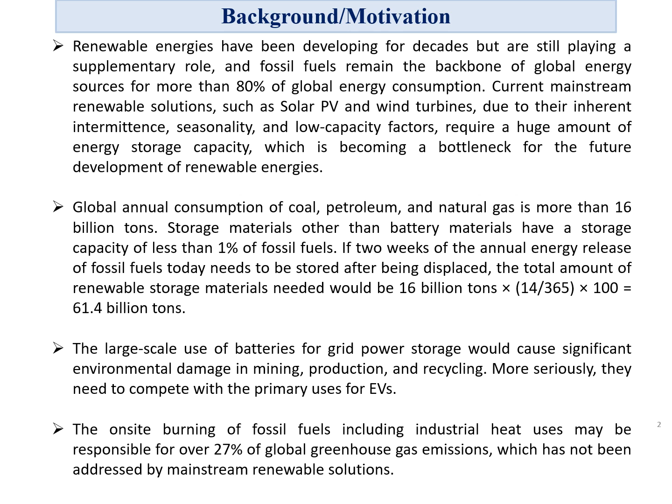This strategy is a nature-based solution, NBS, to tackle global warming, a problem rooted in natural processes. It proposes simple, natural fluids, utilizing water for storage and air-water systems for power generation, avoiding harmful chemicals typically used in other processes. This method allows for eco-friendly and economical energy storage and generation at low temperature on a large scale.

In particular, the utility-scale underground hot water storage system serves as an alternative to fossil fuel, providing a reliable source of thermal energy for power plants and heating for both industrial and residential applications as needed.

Our air-water power plant can generate a stable more than 100 megawatts of power using hot water stored at nearly 100 degrees C. This system replaces traditional fossil fuel power plants, ensuring consistent power supply regardless of weather conditions.

Overall, this approach not only significantly reduces environmental impact, but also cuts costs for both power and heating, helping to phase out fossil fuel with a sustainable all-natural solution.

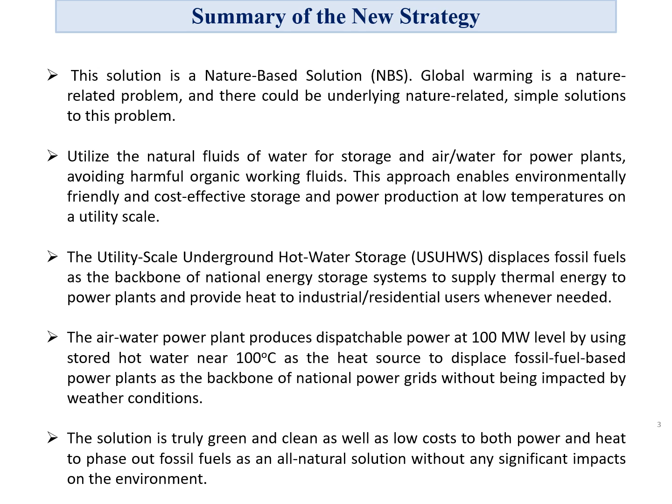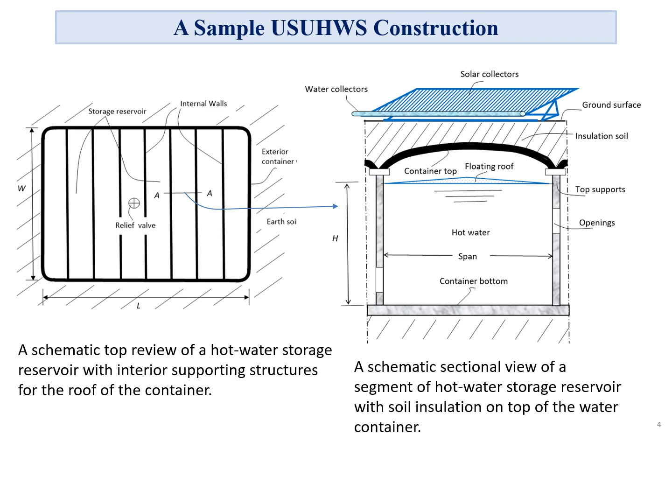Let's talk about sample calculation results of the underground storage system. First, our storage system is incredibly efficient, storing over 80 times more energy per kilogram of water than traditional methods like pumped storage hydropower and compressed air energy storage.

If the size of the underground storage system reservoir has dimensions of length equals 500 meters, width equals 500 meters, and height equals 15 meters. The hot water temperature is at 120 degrees C. The thermal to work conversion efficiency is only 10%. And the water temperature drop before the recharge is 40 degrees.

The total work storage capacity is about 1.75 times 10 to the 7 kilowatt hours. For a power plant of 100 megawatt capacity, the stored energy can sustain the operation continuously for 7.3 days before recharge is needed.

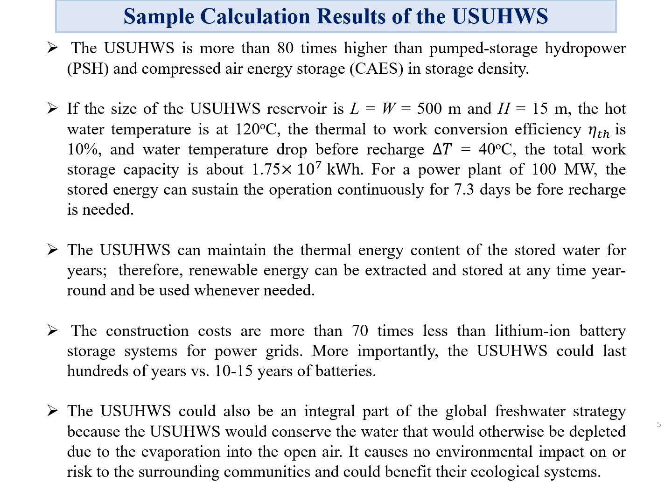The underground storage system could also be an integral part of the global freshwater strategy, because the storage would conserve the water that would otherwise be depleted due to evaporation into the open air. It causes no environmental impact or risk to the surrounding community and could benefit their ecological system.

We are also exploring underground tunnel storage solutions, which could be integrated into mountain areas, using tunnel boring machines, enhancing our capacity and flexibility in storing and utilizing hot water.

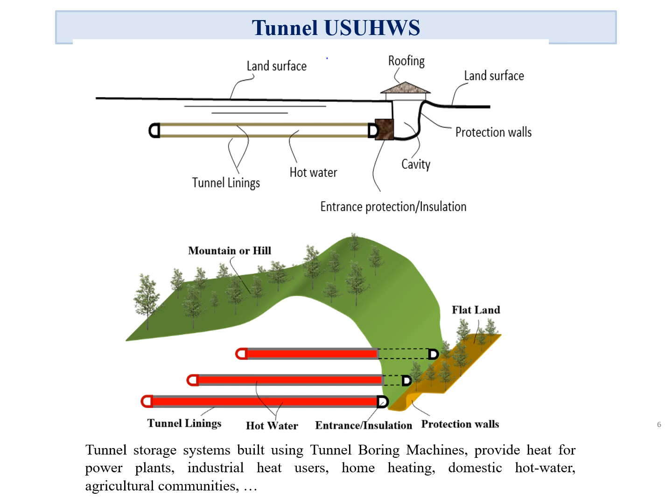Turning to how we collect energy, our starting point is using both direct and diffused solar energy with cost-effective, non-concentrating solar collectors. For the collector's output temperature to be above 100 degrees C, we still have good collector efficiency, with high-performance evacuated flat plate collectors as well as concentrator augmented tubular solar collectors using compound parabolic trough collector (CPC) for hot water production.

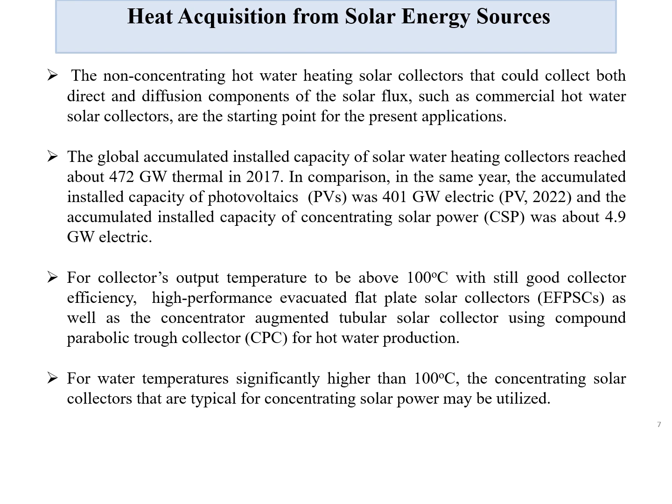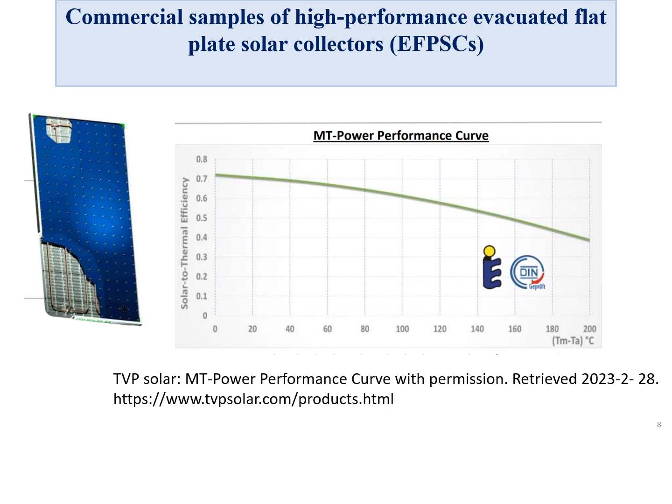Let's turn to air-water thermal power plant. First, some background. We have air-water thermal power plant working with low temperature source, based on the Office of Energy Efficiency and Renewable Energy. Geothermal energy resources below 300 Fahrenheit, or 149 degrees C, represent the most common geothermal resources. A thermal power plant that could enable the use of vast amounts of thermal energy resources at low or medium temperature to generate electricity on a utility scale could have a significant impact on the advancement of renewable energy.

However, this kind of power plant is not currently available, even though some organic Rankine cycle power systems using isobutane, pentane, ammonia, or refrigerant have been developed over the past 40 years. However, the use of hazardous substances working at very high pressure and generally high vapor density has limited power capacity to within 1 megawatt level, with a thermal efficiency of about 10%.

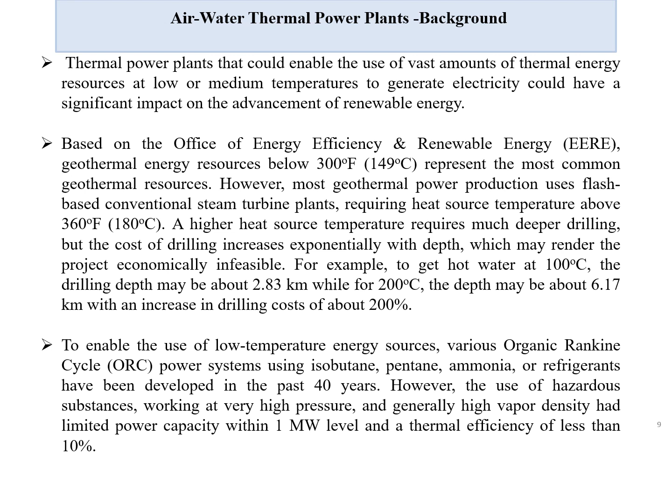For this reason, the concept of an air-water thermal power plant is conceived. Air, or combustion gas, is the exclusive working fluid of a conventional gas turbine-based power plant. The heat acquisition before expansion in a turbine is through sensible heat, which may require more than 1,500 degrees C through the combustion of fossil fuel to attain sufficient sensible heat for high turbine power production.

Water is the exclusive working fluid of a conventional vapor power plant under closed cycle operation. Any meaningful accumulation of air or non-condensable gas is not tolerable and must be removed by a vacuum pump, which may require a heat source temperature significantly higher than 100 degrees C.

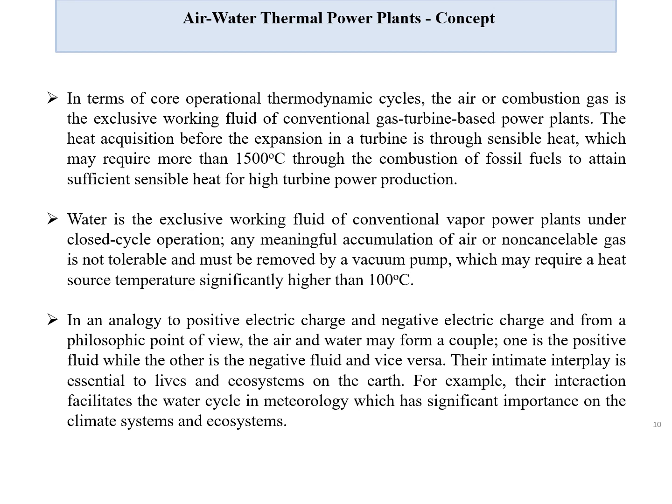In analogy to positive electric charge and negative electric charge, and from a philosophic point of view, air and water may form a couple: one is the positive fluid while the other is the negative fluid, and vice versa. Their intimate interplay is essential to life and ecosystems on Earth. For example, their interaction facilitates the water cycle in meteorology, which has significant importance for the climate system and ecosystem.

The intimate interaction between hot water as an energy source fluid and air as an energy receiving fluid could enable energy acquisition before expansion in a turbine under reduced temperature difference, using an open cycle turbine platform.

Using an open cycle turbine platform to generate utility scale power, the most important action is to raise the enthalpy at the inlet of the turbine, which may include both sensible heat and latent heat. For conventional gas turbine power plants, the first term on the right is the sensible heat, which could be very high because the gas temperature could be more than 1,500 degrees C.

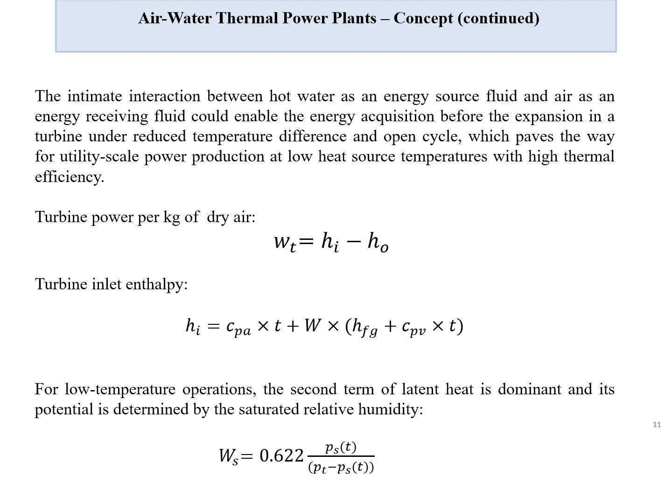And the latent heat, the second term, is negligible. For air-water power plants, however, the first term is negligible because of the low temperature. However, the latent heat term is huge, because of the huge value of HFG, around 2.4 times 10 to the 6 joules per kilogram.

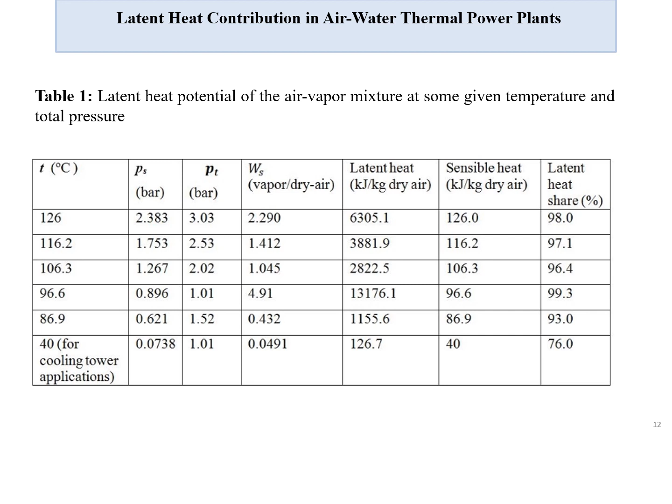Table 1 shows the contribution of latent heat to the inlet enthalpy, which could be above 98%. Now let's discuss how an air-water power plant works.

The hot water flows downward in direct contact with the upflowing air. Direct heat and mass transfer occurs between the water and air, and some of the water is evaporated into vapor, which enters the airflow stream, so that at the outlet of the packing, the airstream is essentially an air-vapor mixture.

The air-vapor mixture with high latent heat then enters the turbine to expand and produce power. After expansion, the air-vapor mixture exits the turbine but still contains a substantial amount of vapor at relatively high temperature. For this reason, the mixture then enters a regenerator condenser.

Simultaneously, the hot water entering the packing exits from the bottom as a cold water stream near ambient temperature, because the vapor mass transfers into the air. This cold water is pumped to the top of the regenerator to enter the regenerator condenser, to recover the water and heat from the upflowing air-vapor mixture.

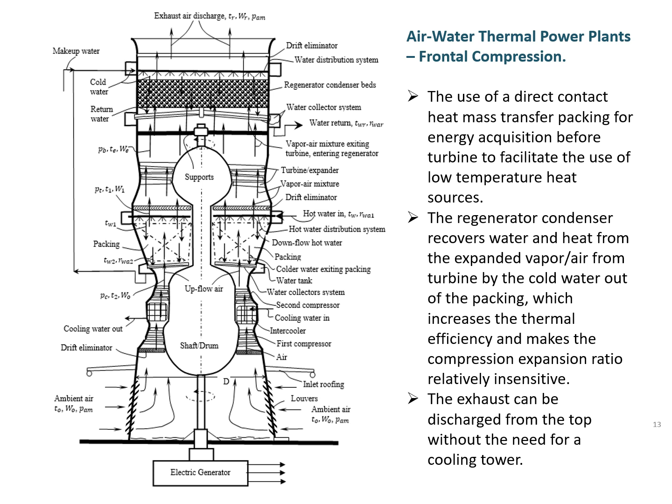In the regenerator, the mass and heat transfer are from the air vapor mixture to the cold water. Finally, after recovering water and heat from the mixture, the water exits the regenerator and is pumped back to the storage for thermal recharging, while the air vapor mixture with minimized vapor content and reduced temperature exits the regenerator from the top and discharges into the ambient as exhaust flow stream.

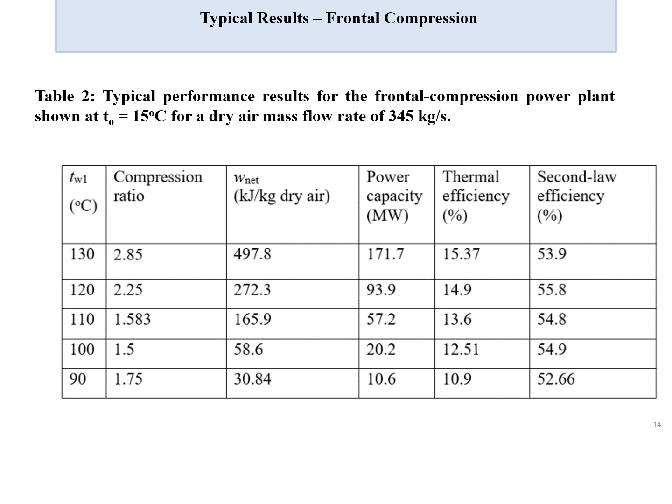Table 2 summarizes the performance of the frontal compression operation. At a hot water temperature about 130 degrees C, the power capacity has reached about 170 megawatt, with a plant thermal efficiency of 15%. But as the hot water temperature is reduced to about 100 degrees C, the performance degrades significantly, with a power capacity of about 20 megawatt and an efficiency of about 12.5%.

In this case, at the inlet of the turbine, the pressure is near the ambient pressure. To create a sufficient expansion ratio for the turbine, a rear compression system is installed at the top of the power plant after the regenerator condenser, which creates a vacuum condition at the outlet of the turbine. The air vapor mixture with a high latent heat then enters the turbine to expand and produce power. After expansion, the air vapor mixture exits the turbine but still contains a substantial amount of vapor at relatively high temperature. For this reason, the mixture then enters a regenerator condenser.

Simultaneously, the hot water entering the packing exits the packing from the bottom as cold water flow stream near the ambient temperature because the vapor mass transfers into the air. This cold water is pumped to the top of the regenerator to enter the regenerator condenser to recover the water and heat from the upflowing air vapor mixture.

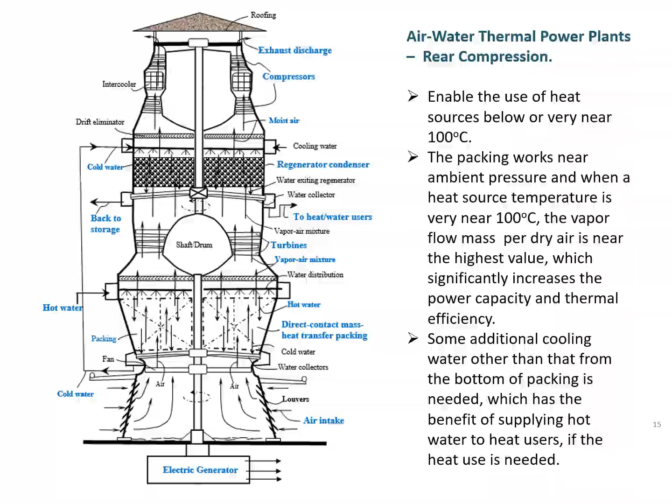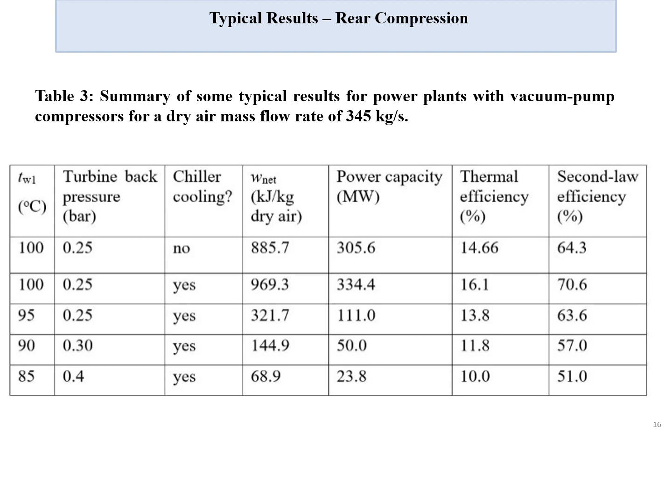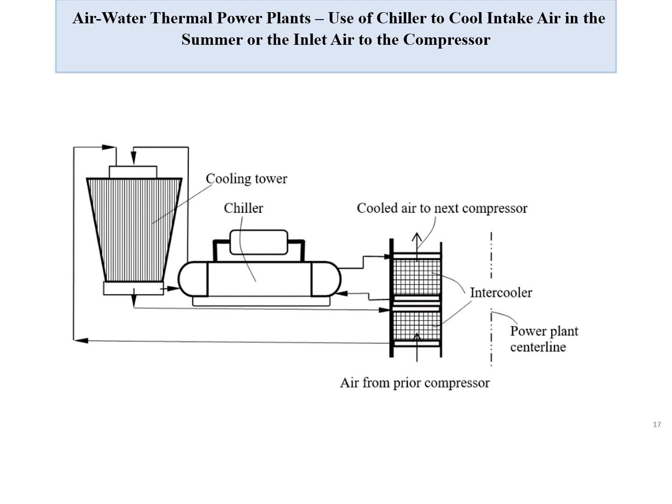Analysis shows that using a chiller to cool intake air in the summer, or the inlet air to the compressor, could have significant benefit to the performance of the air water power plant. Our calculations have shown that an underground hot water transportation pipeline with a diameter of 1 meter and buried 3 meters deep loses less than 4% of its thermal energy over distances exceeding 100 kilometers. This efficiency supports the development of the so-called Internet of Hot Water, Power and Heat.

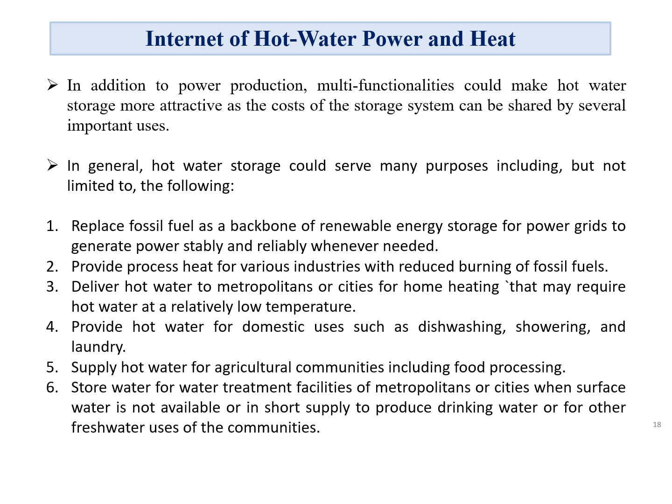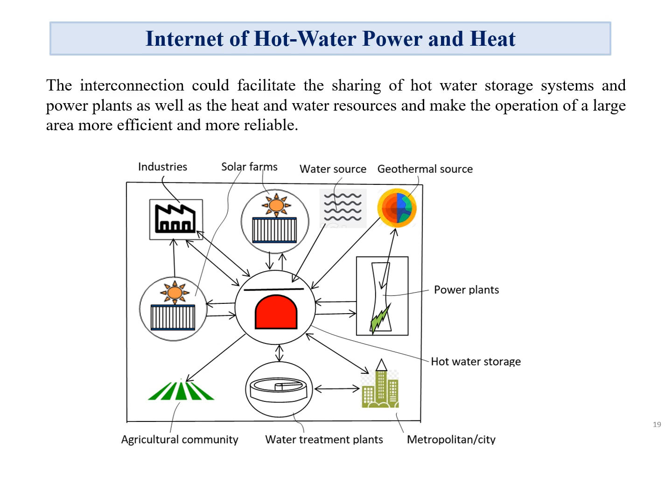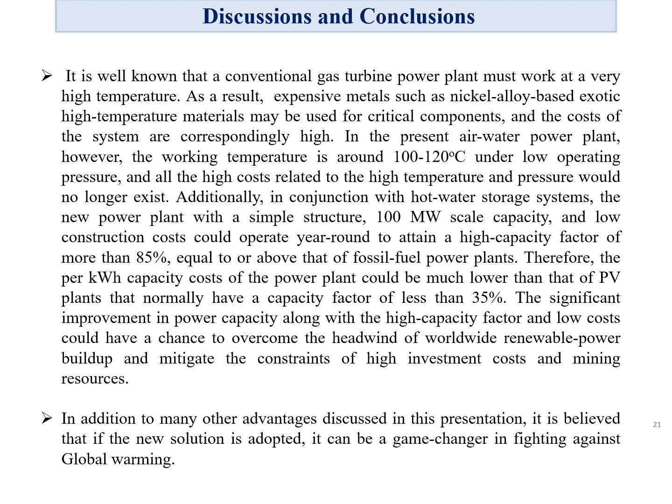We also have a discussion and conclusion on this slide, and the next one. This slide concludes the discussions and conclusions.

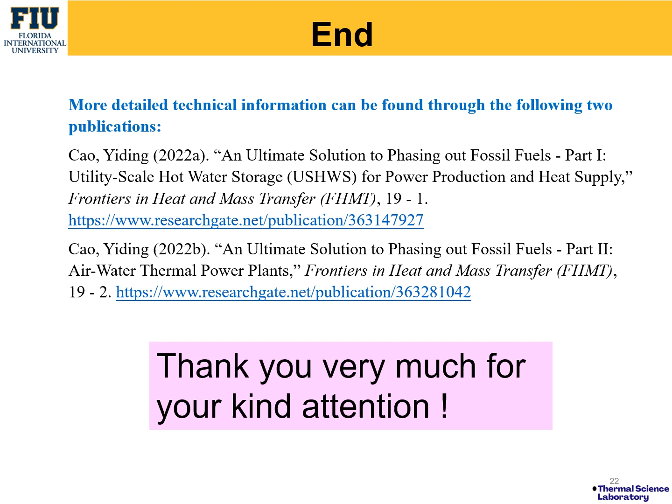Finally, more detailed technical information can be found through the following two publications. Thank you very much for your kind attention.